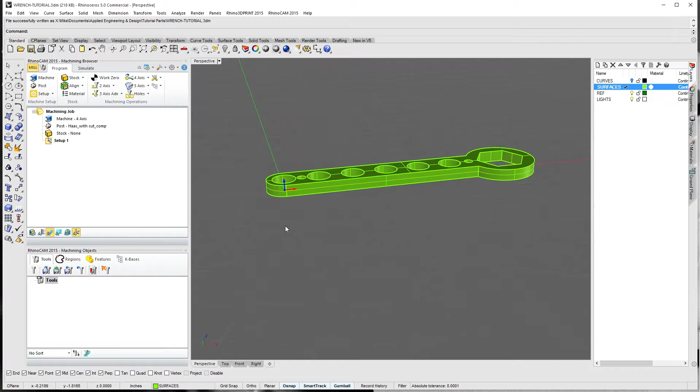So what we're going to do is, I've got this that I just whipped up in Rhino, basically a wrench with a 1-inch hex on the end, works just like a box wrench, closed end, 6-sided. Just something quick I wanted to showcase, taking a little bit from our hole feature video and a little bit from our flip milling video, and we can just make this part.

So let's get started. The first thing we're going to do, as with everything, is check. We're going to go in here. We don't need 4th axis for this one, so I'm just going to go ahead and shut it off so it doesn't output the code for that.

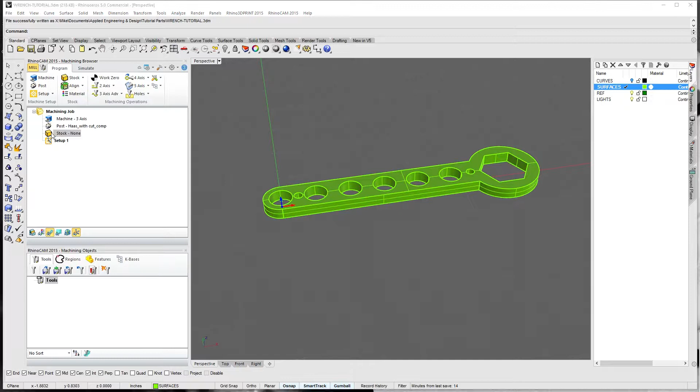We're going to go ahead and set our stock. First thing we need to do is set our stock here. If we do copy model bounding box, it shows that it's 1/4 inch high, which is fine, we're going to pretend we're working with a piece of 1/4 inch steel. And it looks like it's setting the size to about just over 6 1/8 and just over 1.5 inches wide. So for all intensive purposes, that's not the size you would get it.

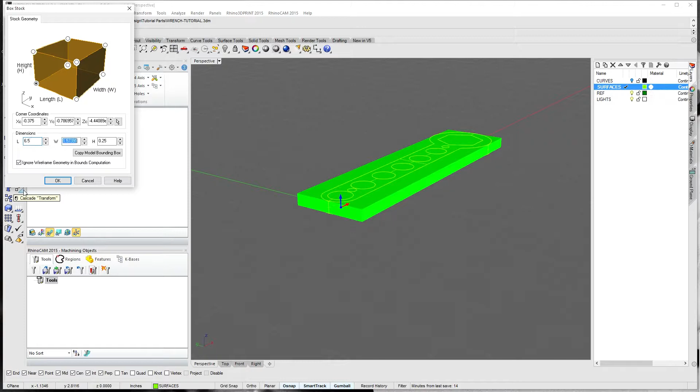So what we're going to do is, let's say we cut this piece from 1 3/4 stock like that. We're going to go ahead and hit OK. And if I turn on my stock, we can kind of see that it's larger than the shape of the model. So now we're going to set up our zeros and everything.

So our first setup here, we're just going to call this op1, and I just double click on that to change it. So we're going to do our setup, and we're going to set up our axes here. And the default setup right now works pretty good, so we're going to hit OK. Oh, actually, we don't need a second setup, let's delete that.

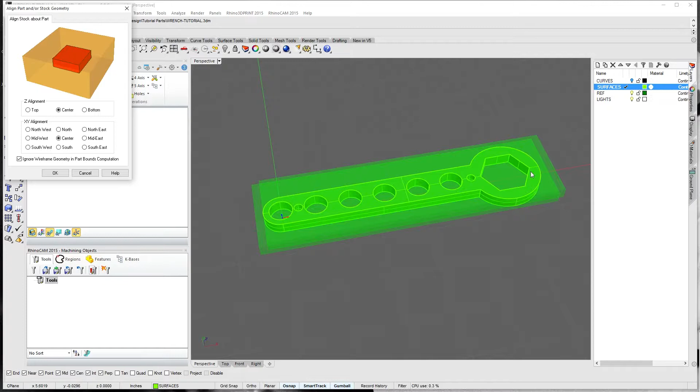So we're going to align, first we're going to align our stock. We just want it to be centered in our stock. The Z alignment can be center, it doesn't matter, it's the same height right now, but we're going to center it so there's a little bit of stock on all sides of the part. Let's hit OK. So now we look at it and we got a little bit of room everywhere.

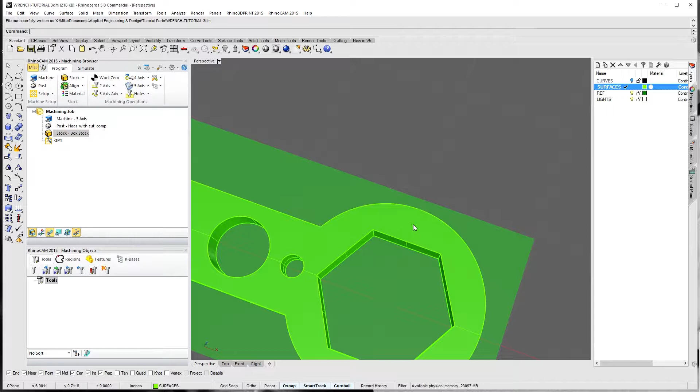Cool. So what I'm going to do is change it, because looking in real close here, if we were to bring a tool in along the edge, and let's say this was just sitting in a vise on parallels, it's going to hit the side of the vise, especially since we're going to machine it down. We don't want it to hit anything.

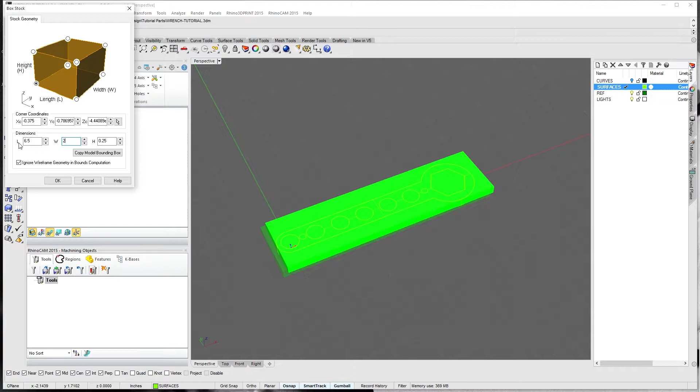And there's 2 ways we can machine this, and I'm going to show you both ways in this video as well. So let's go back and we can just double click on stock, and I'm going to go ahead and make this 2 inches, we'll just make it 3. Hit OK. We're going to realign our stock. Hit OK. And now look, we got all kinds of room there.

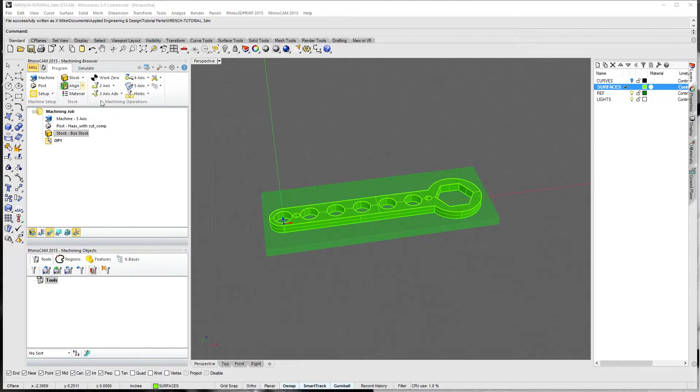So cool, what we're going to do is we're going to set our 0 point to this top left corner, which we're going to pretend this is sitting in a nice vise on our CNC. So we're going to set our world coordinate, and we're going to pick set to stock box. And if we look, it generates an arrow right up at this upper left corner, which is going to be highest Z, which means we'll touch off the top, and northwest position, so that's perfect. We're going to hit OK. And it moves it and brings it down exactly where we're going to want it here.

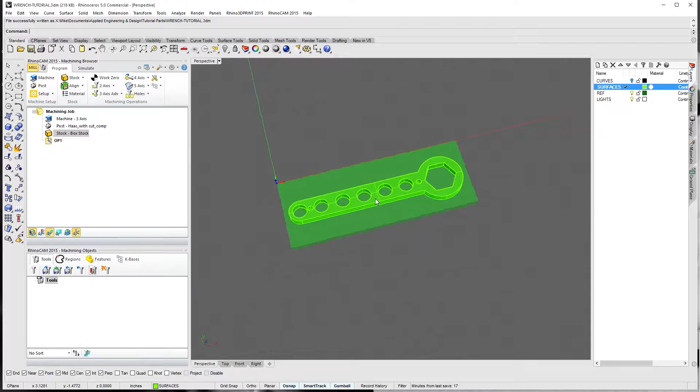Cool, so next what we're going to do is, let's go ahead and add a work 0 also, that way we can make sure it sets out a G54 in there. And we're going to do stock box, highest Z, northwest as well on that, and generate. And that creates this nice work 0 right there.

So the first thing we're going to do is, let's go ahead and take care of some of these holes in here. And I know, since I designed it, that these bigger holes are 1/2 inch, and these little guys are 3/16. So what we're going to do first is, let's drill the 2 3/16 holes.

So let's come down here in our tool browser, and we're just going to create the tool right away. We'll go up to drill. I'm going to change the name to 3/16 drill, change our diameter to 1875. And flute length and everything we can just leave alone for right now.

I like to copy the name into the comments, so it'll output it in the post. We're going to change this to flood coolant, and we're going to leave it as tool number 1. Feeds and speeds, let's do our load from file. So let's say we're making this out of, we would probably make this out of tool steel, but we're going to go ahead and just do it out of like 1010 or something kind of mild steel for now.

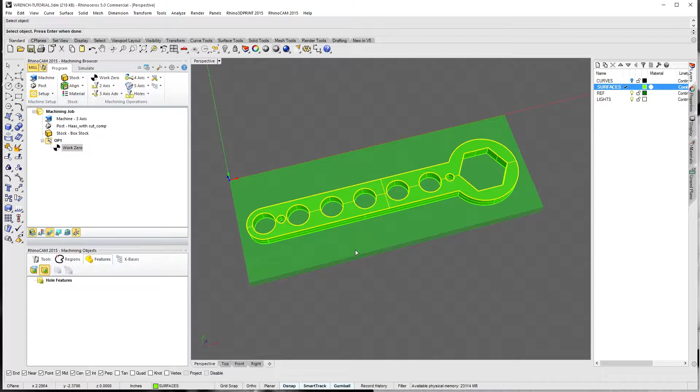We're going to come in here and do create hole features. I'll give it a minute to pop up. Oh, I'm sorry, we need to select the object. And hit OK, or right click as I did. And you can see it created these 2 hole features, and it picked the 2 right ones. And I didn't have to go click them, I didn't have to do each one. If we tick down, we can see there's instance 1 and instance 2.

Great. Now we can create our hole feature machining operations. And that brings up this little dialog box. For these, we're just going to do standard drill. I'm going to drag it over. And we're going to set our top Z, which will be 0, and our bottom Z is minus 0.25. It selected everything already. So let's do create hole feature mop set.

If we take a look at the hole feature 1 that it created here, it created a standard drill as an operation, and you can see that it created drill 1. We already had created a 3/16 drill right in the beginning, so we're going to go ahead and change that out by double clicking on standard drill. Coming up into tool, selecting 3/16 drill. Feeds and speeds, we're going to load from the tool, which was everything we set earlier. Clearance plane looks good. Cut parameters.

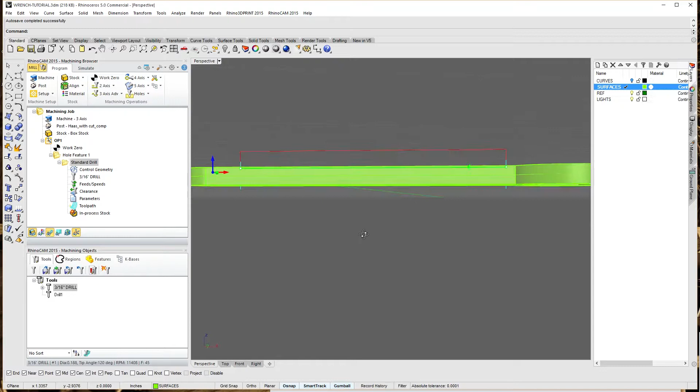So now the drill depth, all we're going to change here is we're going to add the tooltip to drill depth. That way we get a nice clean hole through. And sorting we can leave alone. So if we do generate, you can see it created exactly what we want, and you can see underneath it poking right through. So if we go ahead and we simulate it, you can see it just drills the 2 holes all the way through out of our plate. So that's going to be the first thing we're going to do.

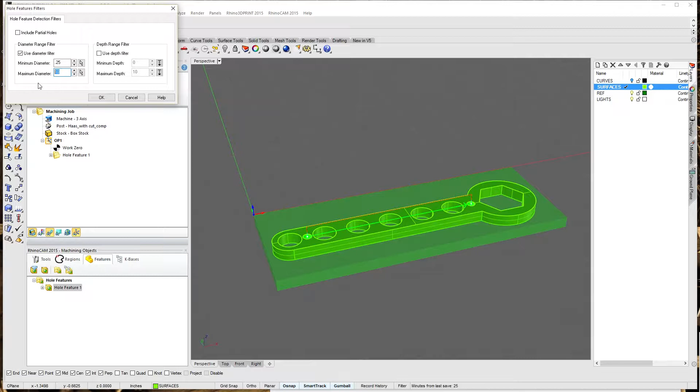Next, we're going to do these other holes as well. So we're going to do the exact same thing. I'm actually going to come down here and I can delete that other drill. This time we'll let it create its own tool, and we'll just edit it after the fact. Let's go back to features. Let's change our filters. Now we're going to set our diameter filter. We want it to be a minimum of 0.25 or 1/4 inch. And our maximum, we can leave that alone. So we hit OK. So now it should pick these 6 holes, 6 1/2-inch holes.

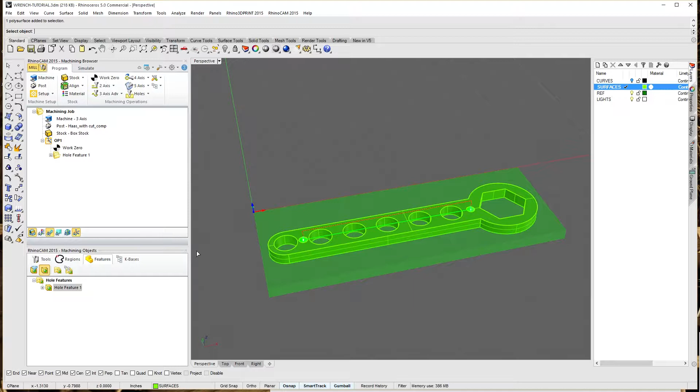And if we hit that and we select the top surface, right click. Oh, I hit the wrong one. Select the object. Oops. There we go. If we select the object first and hit create hole features, there we go. Now we can see that it selected the 6 large holes right there and created it as another hole feature instance.

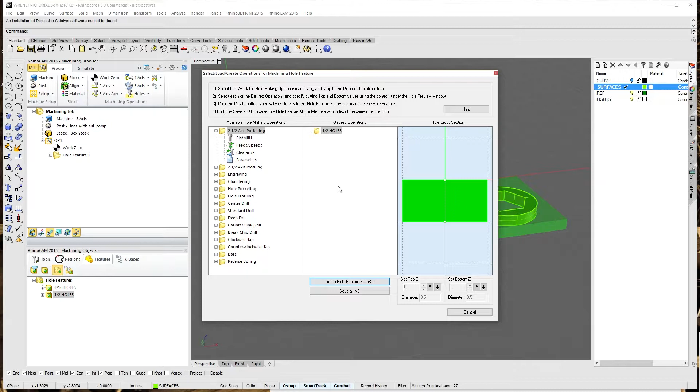And just for sanity purposes, we're going to name this 3/16 holes. And we're going to set this to 1/2-inch holes. Cool. So now we're going to do the same thing. We're going to click on it. We're going to do create hole feature machining operation. And now, why don't we hole pocket them? Instead of hole profile, we'll just pocket them right out. Drag that over.

Going to add a flat mill. And we can see all of our settings the same. Create hole feature machining operation. Now it came over and it named it half holes, which is what we named our feature down here. And if we tick that down, we can see hole pocketing. And if we come over to tools, we see there's a flat mill now. Let's double click and go into the flat mill. And let's say we're going to do it with a 1/4 inch end mill.

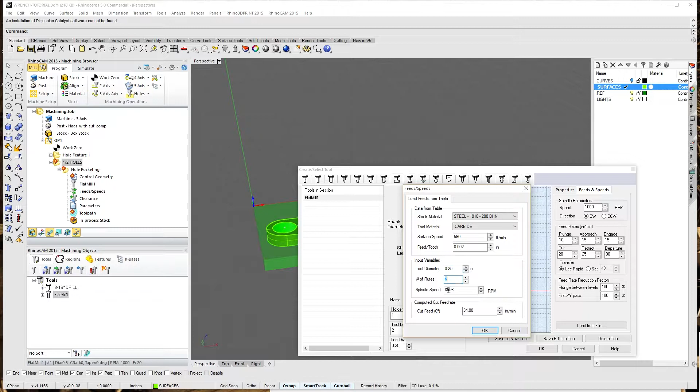Set our diameter. It's probably only going to be a short little tool. There we go. Tool number 2. Say it's a 2-fluter, flood coolant, feeds and speeds, load from file. Change this to 2 thou again. Make sure this is set to 1/4 inch. And leave everything, hit OK, save as new tool. Hit OK.

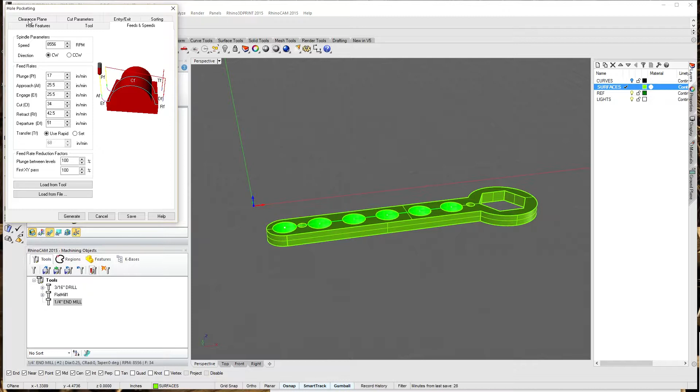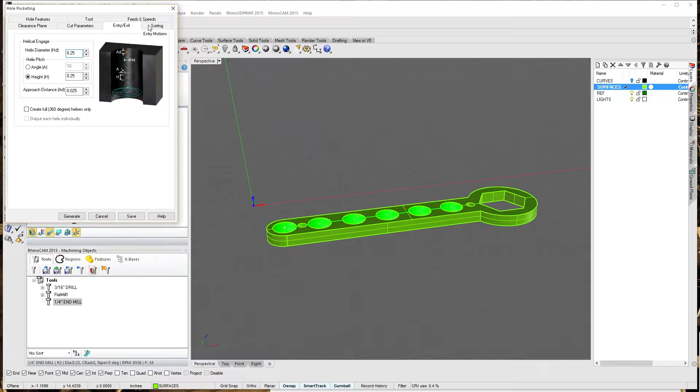Actually I should have edited it, but we're going to end up doing the same thing. Double click hole pocketing, tool, choose 1/4 inch end mill, feeds and speeds, load from tool. Clearance plane looks fine. Cut parameters. We're going to check this box here that says determine using 3D model, and that'll detect the depth. And use arc diameter is already in there as well. So we're going to leave everything else alone for now. Same in here for entry exit. And we're going to go ahead and hit generate. And as you can see, it cleans it up right at the bottom there.

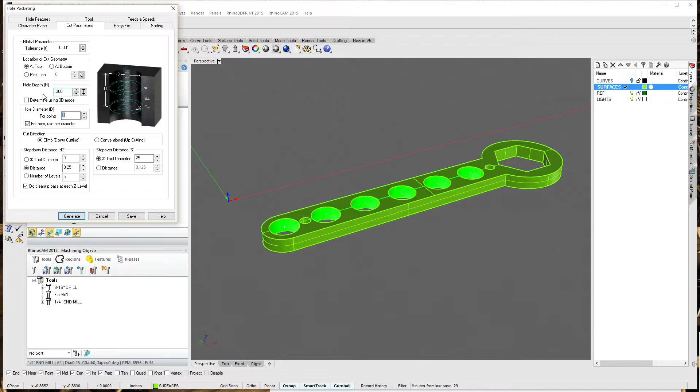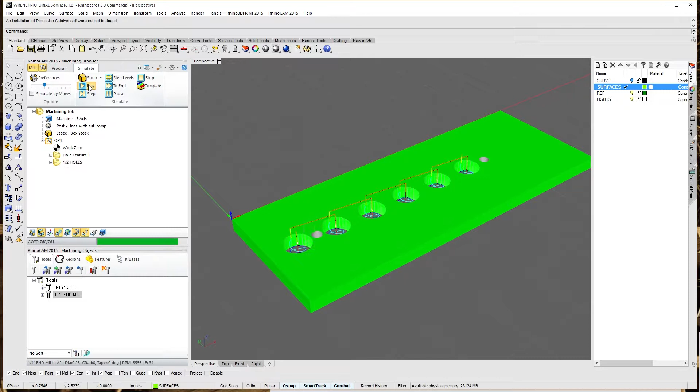And let's say we don't want to leave a burr on that edge and we want to go a little bit deeper. We can come back in, cut parameters, turn this back off, and let's say we're just going to go down an extra 50 thou. So we set that to 300. And we can see it pokes out the bottom just a little bit. Perfect. Cool, now we can delete this flat mill here. Now if we simulate that, exactly what we want it to look like.

Cool. So now we want to take care of this hex shape here. We're going to set up pocketing, 2 1/2 axis pocketing. And for our regions, we're going to select drive containment region. I'm going to select the 6 sides of the hexagon here and right click. For tool, let's rough it out with that same 1/4 inch end mill. Cut parameters. We're going to leave 5 thousandths of stock so we can come in with like an 1/8 inch and clean it up.

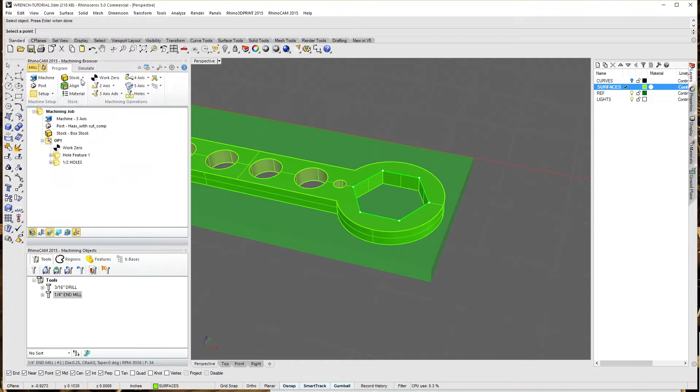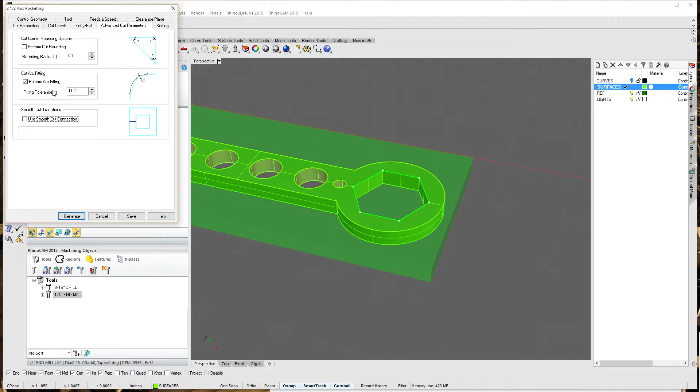And so location of cut geometry, we can see it's at the top. For our depth, I'll show you using this little arrow here. We can hit this arrow, check that corner and that corner, and it's automatically going to select 1/4 inch, which is nice. If you have a solid model, you can just pick your depth right there. Let's do 50 thou per step down. We're going to helix into it as well. And here's the cool feature. We're going to check apply entry exit at all cut levels, so it helixes in each time. And under advanced cut parameters, we're going to turn on arc fitting, 2/1000 fitting tolerance, and use smooth cut connections.

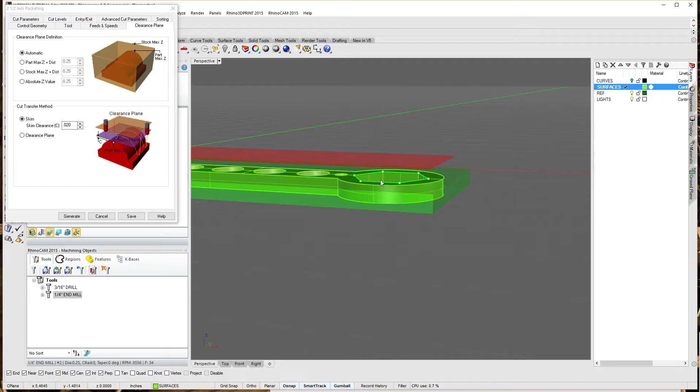We're going to jump back over to clearance plane and set our cut transfer method. Since we know it's going to be working on this for this whole machining operation, we're going to set our skim clearance to 20 thousandths, which means instead of pulling all the way back up to the main clearance plane way up here, between each step down, it's only going to pull back up 20 thou. And we'll see that in the operation here. You can see it doesn't pull all the way back up.

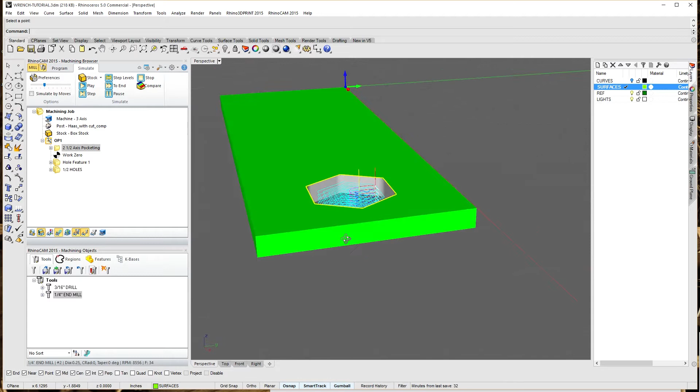So now if we simulate this, we can take a look at what it leaves us. And that's looking pretty good. And again, just like the other holes, let's go back in and set our cut level to 300 so that there's no burrs. And regenerate. So we're good.

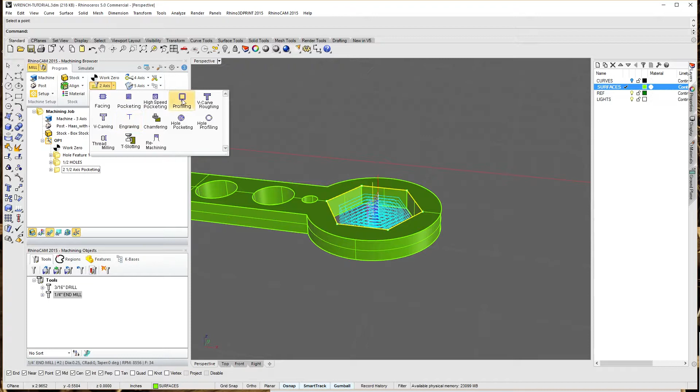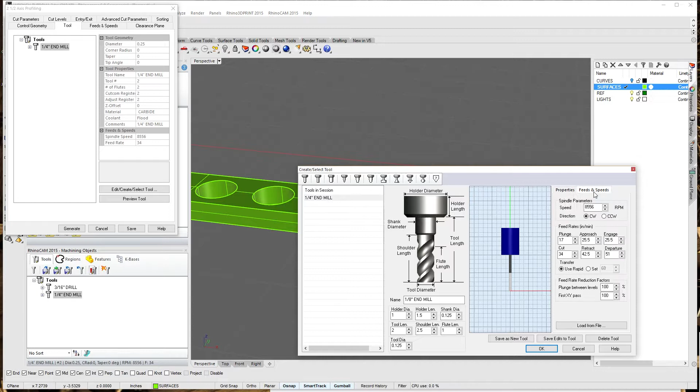All right, so the last thing we're going to do for the hex is add a profiling. We're just going to choose the same 6 sides of the hex. Now for tool, we're going to create a new tool, an 1/8 inch end mill. We'll leave everything else, just change the name over here to tool 3, and make sure we change it in here as well.

My machine maxes out at 12,000, so we're going to set that to 12. Hit OK. Save as new tool. OK. Feeds and speeds, load from tool. Clearance plane looks good. Cut parameters. Now let's say I want to make it slightly bigger, because if it's going to fit around a 1-inch hex, maybe we want 5 thousandths of clearance. So I'm actually going to set a negative number here, -5 thou, which should expand it a little bit into the surface there.

And we're going to check this box, use outside/inside for closed curves, and we're going to do the inside. And cut levels is at the top again, and we know we want to do 300. We can do it all in one step because we're just going to profile the edge.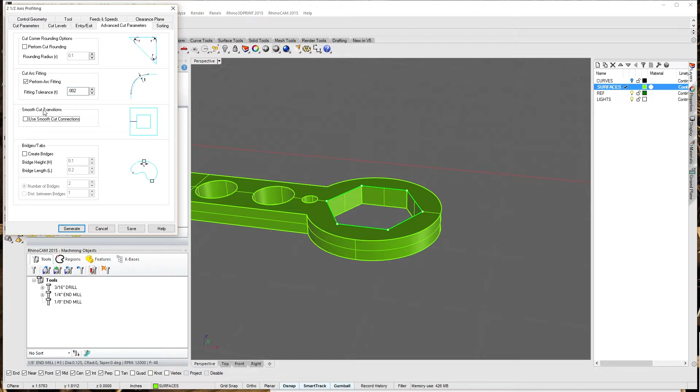And we're going to do 2D entry. This is a little small, but we're going to take a look at it, see how it looks first. Turn on our arc fitting and smooth cut connections. Hit generate. So now let's take a look at our tool here. And our path, this arc comes right into this corner here. We definitely don't want to do that.

So a little trick here: we can't do curve seam on it. If I go run curve seam, it says select a closed curve. So I'll show you a little trick: we're going to run dupe edge. And I'm going to choose the exact same 6 segments, go into my reference layer, right click, and hit join. So that made a single closed curve now. If I turn this off, you can see my closed curve right at the top.

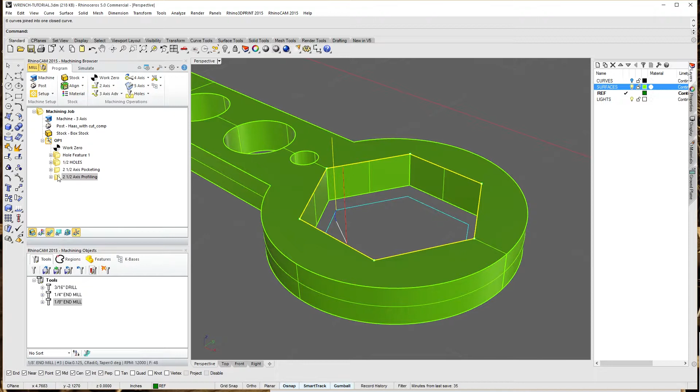So now if we go back into profiling, remove all that, select drive containment. Now we're going to select that curve I just created and generate. So now the curve has what we call a seam at this point here. Still looks bad going right into the corner. So now I can run curve seam, and we're going to select that curve and right click.

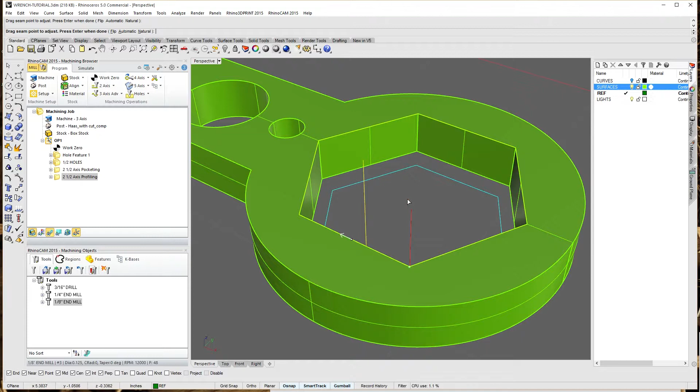So now there's a little arrow right here, and I can move around and select this point. We're just going to drag it till we get to this midpoint on the bottom. Right click, and regenerate. There we go. Now we got a nice radius into the corner, a nice radius back out. Exactly what we want.

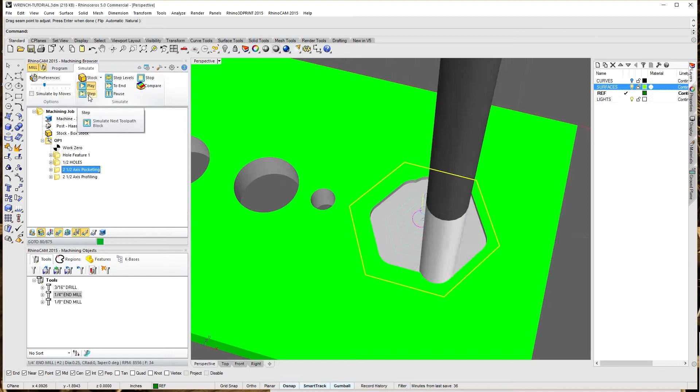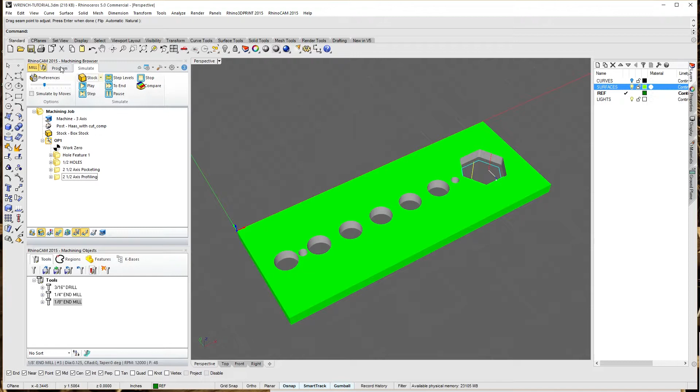Now if we simulate that, just like that. The reason it looks like that is after we changed the depth to 300, we didn't rerun the simulation. So we'll go back and rerun this one, and now we'll run the profile again. And there we go. Looks nice. Now that we have all our inside features, we can work on the outside. I think we'll do the exact same thing.

We'll create this curve. This is essentially a 2D model, we're doing everything 2D. But I think this is fairly typical of what you would be working on if you had a job for CAM or needed to make tools. A lot of people just make their own tools as they need them. We do that as well. So now we're going to profile this edge, and let's say we're going to drop it right out.

So I'm going to run dupe edge again, and select this entire outside edge. And then join. So now we got a single curve around that top edge there. Just like everything else, we're going to do profiling. It's already pre-selected. We're going to do our 1/4 inch end mill.

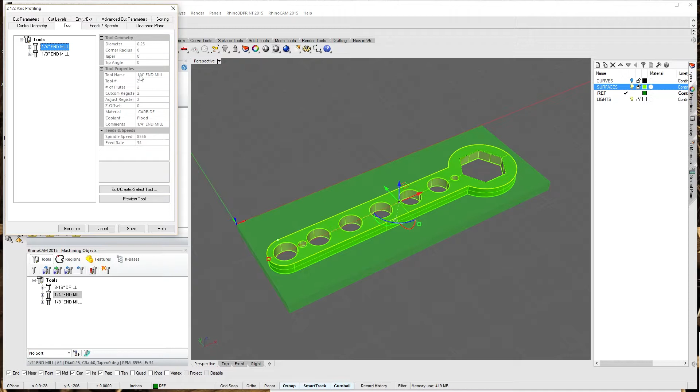Our cut parameters: we're going to use outside/inside and select outside this time. Our total cut depth is going to be 300. I want that last finish depth to be very, very thin. So I set our rough depth so that it should leave 10 thou there, and then it'll finish off with that final pass to drop it out.

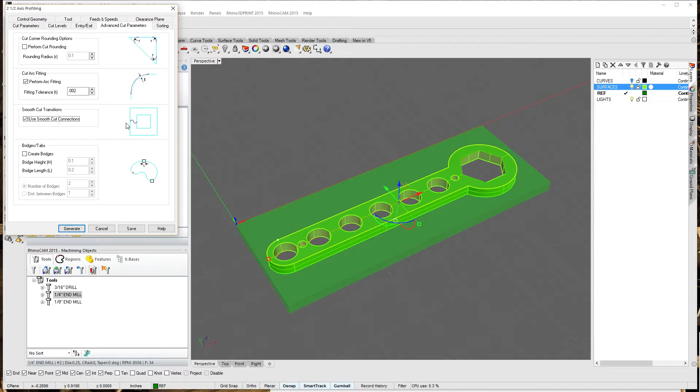So let's go to entry exit. This time we're going to do an along path 3D entry, which means it's going to ramp down into it. And we're going to apply entry exit level at each cut. In advanced cut parameters, we're going to perform arc fitting, so it makes a nice arc around the two outside edges. Turn on smooth cut connections and hit generate.

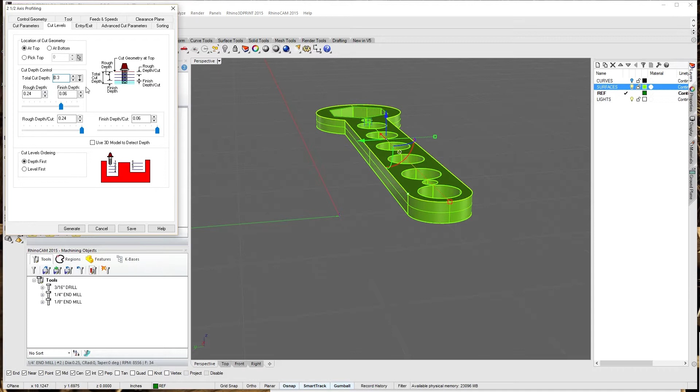And you can see it's going to come in and ramp. That doesn't look right. It's at the very bottom there. So let's go back in and take a look at what happened. Yeah, everything is set to the top. Oh, I'm sorry, I see what I did.

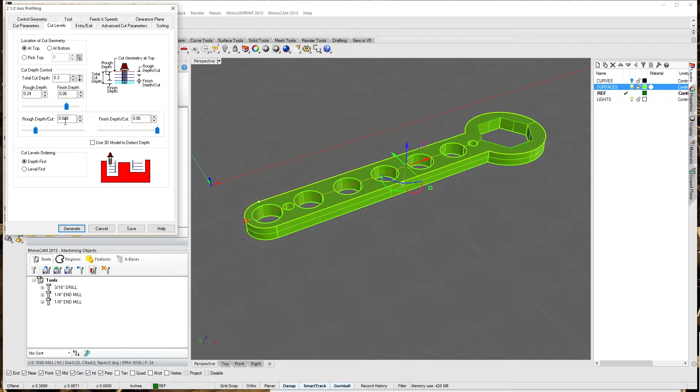I left my rough depth cut at the full 240 thou. So we want to lower this way down, so we're doing about 48 thou per cut. Hit generate, there we go. Now that looks right. It's going to cut all the way down until we get to the bottom and do that last final cut. So let's simulate this.

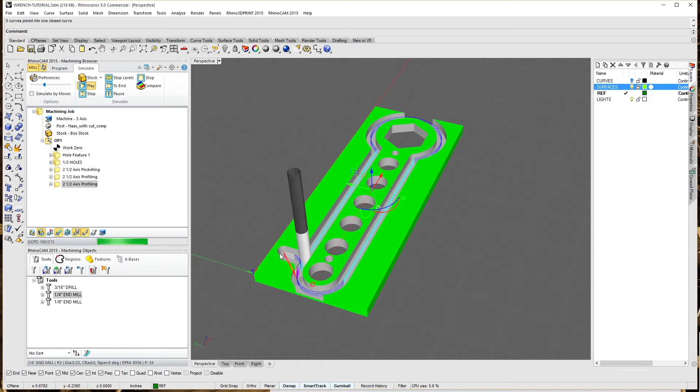You see that exit here? We lucked out. That's not going to hit the vise because we pocketed all that extra material there. But I'll show you a trick to fix that. Like, let's say we didn't want this to come out like that, and we don't want this to ram into there. So that's a couple things we want to change. That's why the simulation is so great.

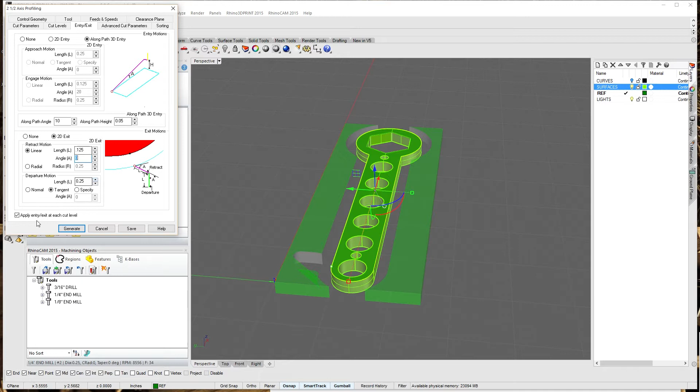So if we go back in, let's go to our entry exit. And what we're going to do is we're going to change our entry exit to linear. And the trick here is to set this angle to 0, which will be right along the tangent. And we can set this a little smaller to 0.125. And we're going to turn the skim clearance back off to go to the full clearance plane. You can see it's going to zip back up and go over.

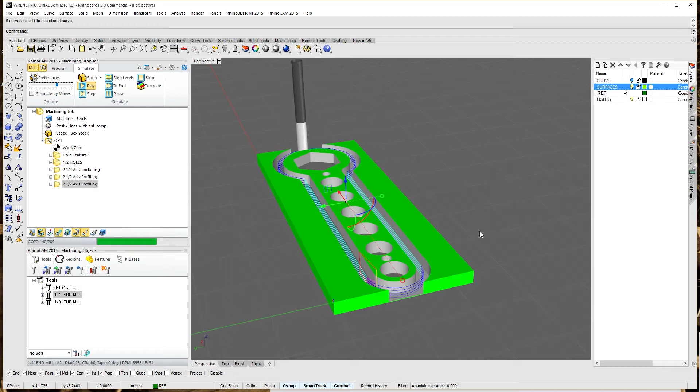Let's watch the simulation real quick. Speed it up. And you can see it's ramping down each one. And it does go up to the clearance plane, but it's not going to hit anything. So cool. So that, if we were done, that's cool. This would allow us to let it drop out like this.

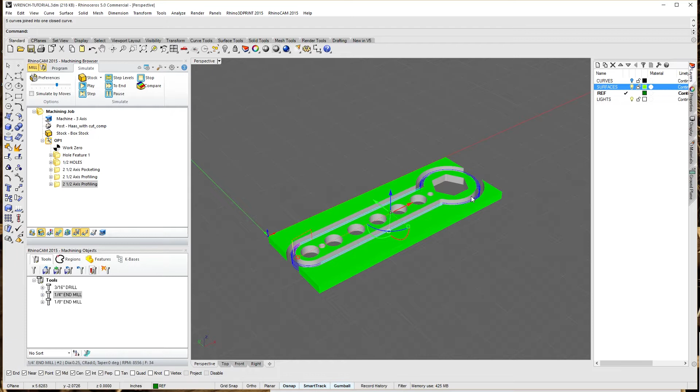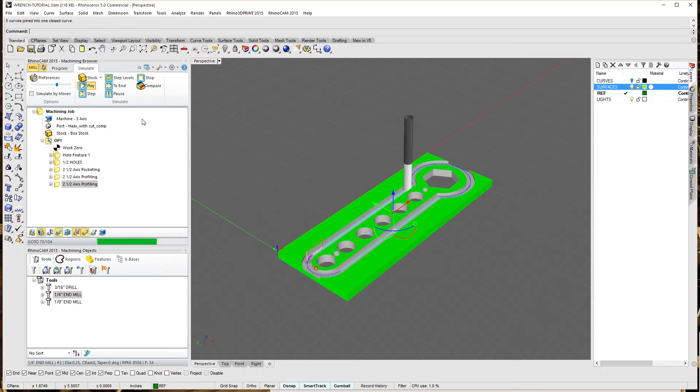Now let's say we wanted to machine both sides still, but we needed a way to locate. Can actually use this edge here. What we would do is, let's change this now to our cut levels. Our total cut depth is going to be half the depth. We do it all in a rough. Generate. And if we look at the simulation now, it'll go down about halfway and leave it like that. So now we would want to flip it.

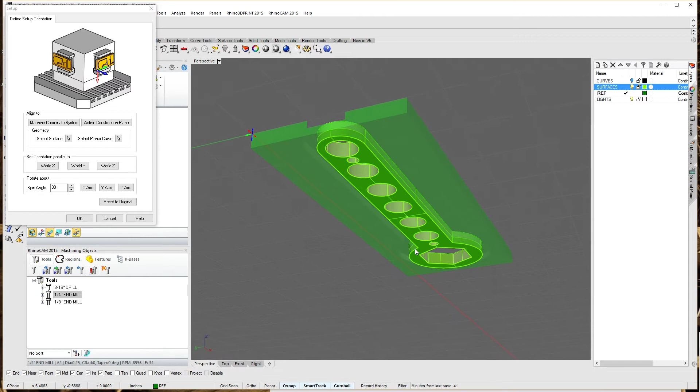What we're going to do is we're just going to create Op 2, do setup, CSYS, and I'm going to go underneath and hit select surface. And I'm going to select this bottom surface, and you can see it changed the arrows to that. So now what we're looking at here is everything is kind of flipped. But our Y is the same.

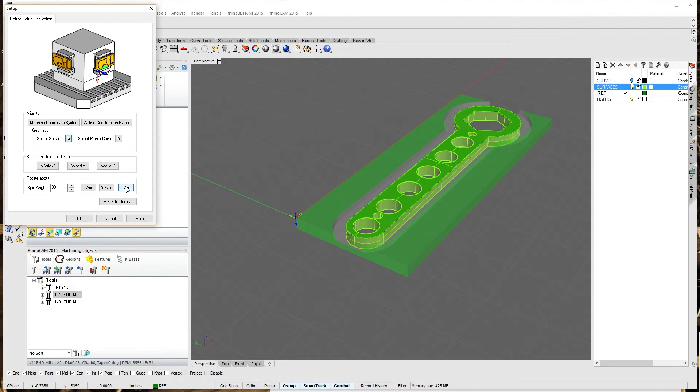So what we're going to want to do is take a look underneath at how we're going to use this exact same corner. That way, we want to touch off this exact same spot so that everything lines up right. So if we're going to flip it, let's say we flip it this way, 180 degrees. So this is now down here. We're actually going to want our Y to be facing down, opposite of the way it was before. So we're going to rotate around Z till we get there. And so now, if I turn it around, that's how it's going to look. That's the side we're going to work on. Cool. So we hit OK.

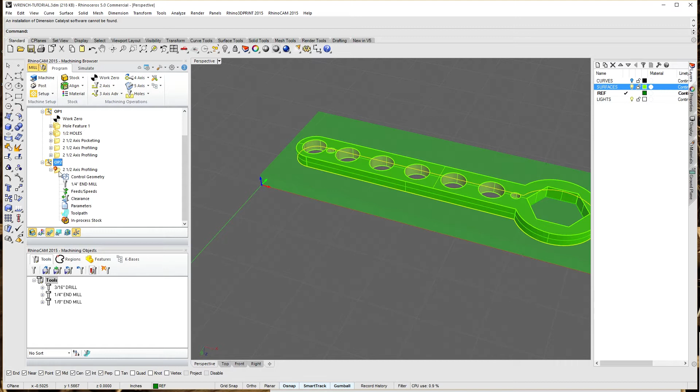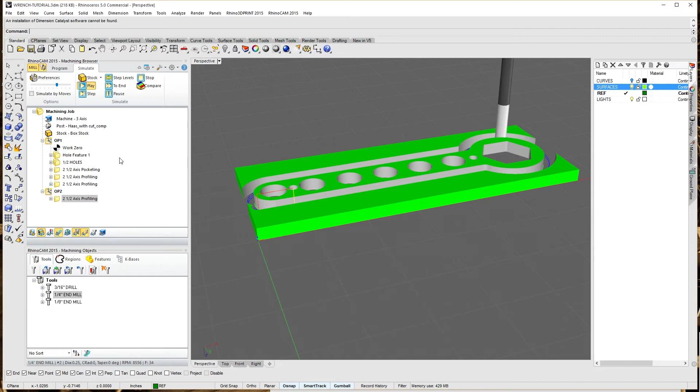Change this to Op 2. What I'm going to do is I'm going to take this, Control C, Control V, bring it down here. Now, if all I do is regenerate, it thinks that's the top still. We're going to go in, change our cut levels to do at bottom, hit OK. And now if we simulate, there we go. Watch that again. Yeah, so we don't want it to do that.

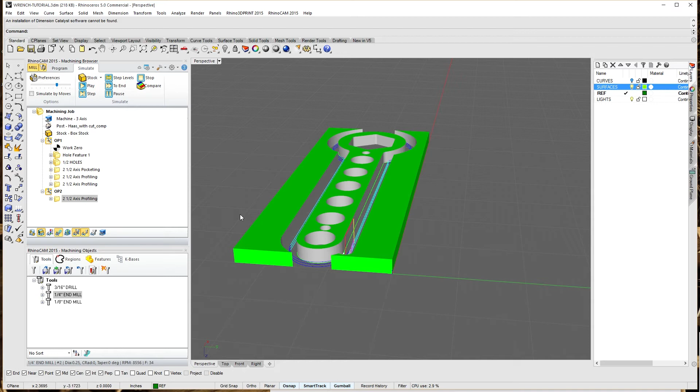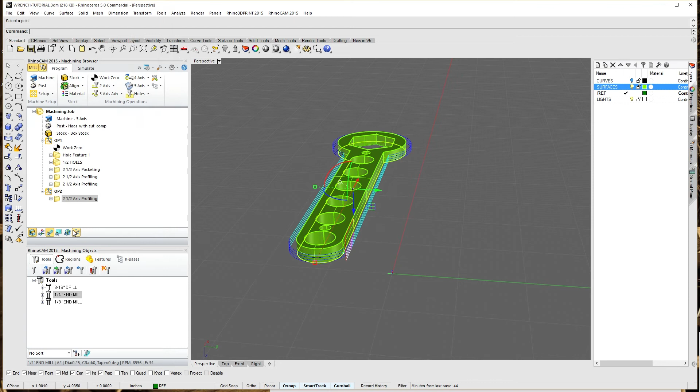What happened was, by doing at bottom, we actually want to move that piece up. But without doing any more work in Rhino, we can do it right within RhinoCAM. Cut levels, we can do pick top. And I'm going to hit this little arrow and just choose a point that's on top. So now that set the top there, and because we want to make sure it cuts all the way through, we're going to do like 175 and generate. Now it's doing it correct, and you can watch it. There we go. As simple as that. We just made a wrench in 2 different ways.

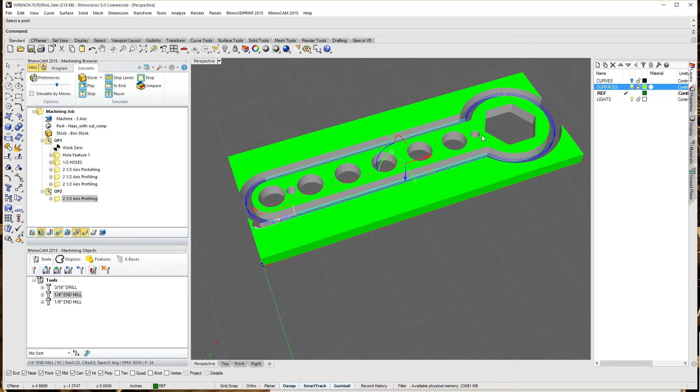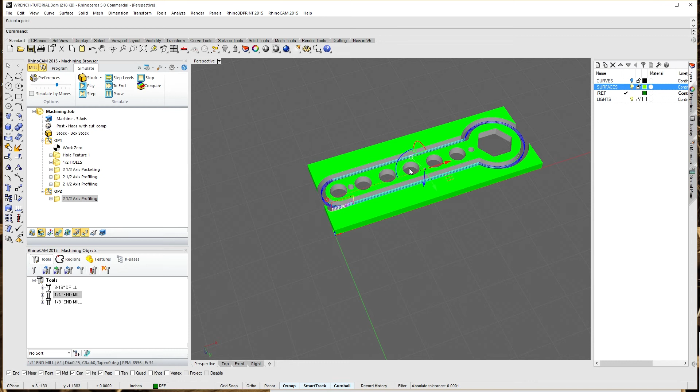Now I drilled those 3/16 holes here because that would allow us to actually bolt it down to something if we needed to work off a plate, which is nice. We could take a plate like this. Let's say we didn't have enough room, or we wanted a plate that was very close like that. If our stock was close, we could then do all our hole work in a vise, make a whole bunch of plates like that, then bolt it down to like a piece of Mic 6 or some fixture plate, and then do all our cutout in one step.

And that way that would be pretty accurate as well, and we'd be locating now off those 2 pins, which would be easy to set up in here. Just change our Work Zero to the center of one of those pins. So quick and dirty little making a wrench here.